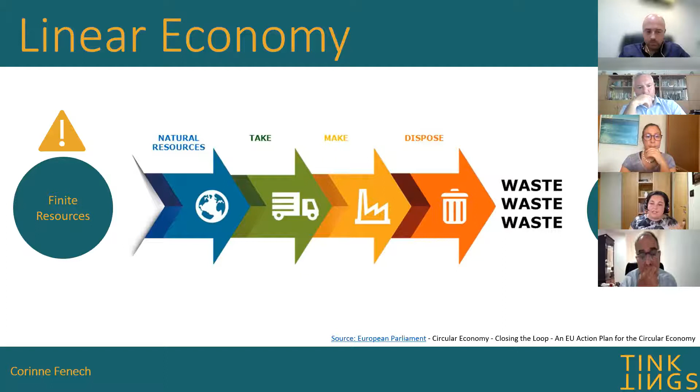The line represents the linear economy, the zero represents the circular economy. So if we have a look at the linear economy, it's very simple. We take what Engineer Rizzo has termed virgin material, we take it from the earth, we make something with it, and we dispose of it. And this leaves us with two big problems: the first one is finite resources, and the second one is increasing waste.

There are three main different economies which we are quite used to. The first one is the one which we have hopefully left behind now, and that is the normal linear economy model, where we take, we make, we use, and we waste. Then there is the recycling economy, which we are getting used to quite a lot, and it has become a good concept which every household knows. That means that we take, we make, we use, and we recycle the waste.

But then there's also the circular economy, and that means - hold on a bit - that means that we recycle, but also we return, we reuse, and we repair. And these are concepts which are very, very important in the circular economy.

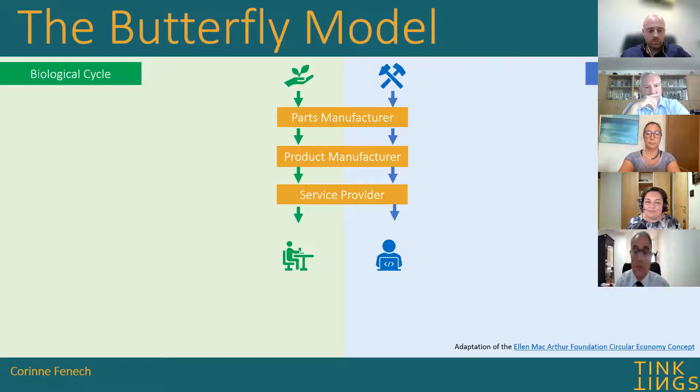On the other hand, if we look at this mobile phone, we have the parts manufacturers which produce the internal components of it, the product manufacturer who brought up this, and the service provider is the shop from where I bought this mobile phone. Okay, so here we are not consumers, we are users. And obviously in the linear cycle, we have waste, which comes out of that.

Now, the next part is where circularity comes in. And the smaller the circles, the more effective we are.

The first thing is that we need to reduce the waste in the biological cycle. That's where businesses come up with concepts like using wilted fruits to make smoothies, for example. There we are reducing waste, and that's less expensive than having to figure out what to do with the waste.

But then there are also business models which focus on restoration. We have businesses which work in this area, and I'm going to demonstrate one that works very well. They restore the biomaterial back to the earth so that we can have new agricultural products.

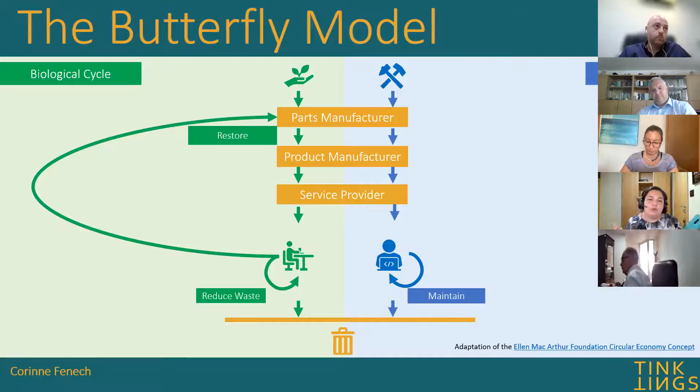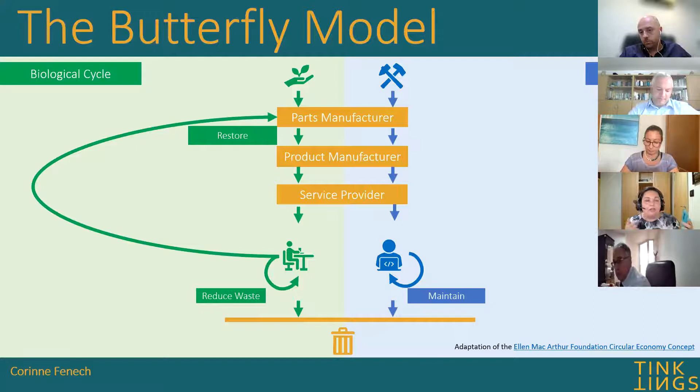On the other side, there's the maintenance. So if I'm looking at this mobile phone, the first thing that comes to mind in circularity is making sure that I maintain it well. And not just I as a consumer, but there is money to be made from businesses who work in this cycle as well. We are very much used to businesses wanting to sell more and more, but nowadays businesses are also working on making a profit through maintenance, through remanufacture, etc. So as you see, the maintenance here is a very small circle.

But then there's the redistribution. Let's imagine that I'm done with this phone because I want to buy a new one, but it still works. There are also businesses working on the redistribution side, service providers who now redistribute and resell this product.

There's also the remanufacture part. Let's imagine that this phone went faulty, and it went back to the product manufacturer. This means that the manufacturer has remanufactured this same phone, changed some components, and sold it back.

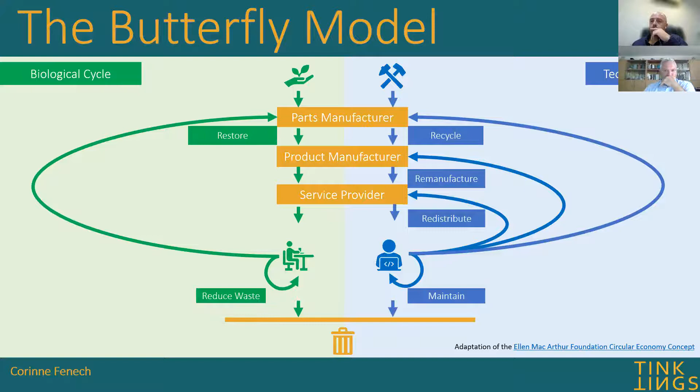And then there's the recycling part. As you can see, the recycling part is the one furthest away, and that means that it's the most expensive in the circular economy. It's not bad, but it's not as good as the remanufacture, redistribution, and maintenance cycles. This means that this mobile phone gets disintegrated and is made into something new.

Now, innovation is very, very important. That is where we come up with solutions for problems we have seen before. I'm going to give a few examples of businesses working in this area.

So we have AlgiKnit, for example. These are people who are creating fiber from seaweed. And here's the interesting example I was talking about: these solutions use biodegradable material to feed flies and produce pupa. What happens here is that we do not feed fish expensive fish, we feed them something which is not edible. And it's not just for fish, these are used as pet food and as chicken feed as well.

There's another example from the Netherlands, which is Fairphone. They've been working on this model for a few years. I'd say they're getting better, although it was a rough start. They work mostly on components and focus on maintenance and giving a fair wage to employees all over the world. And they make sure the phone has a longer battery life, because yes, battery life can be designed to be longer or shorter.

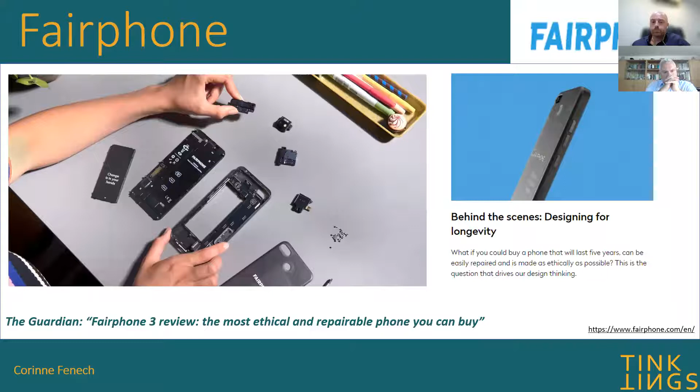Mud Jeans, again from the Netherlands, have between 23 and 40% of their products coming from recycled goods. They have also entered what is called the slow fashion movement. By slow fashion, we mean that we don't change our pair of jeans every year. There's fast fashion and slow fashion, and they happen both in the circular economy. So there are companies who ensure that clothes are biodegradable and their life cycle ends after, say, 10 washes. And there are others in the slow movement, meaning you can rent jeans and give them back to the company a year later, and depending on the quality, they resell it, remanufacture it, or simply recycle it.

This is the final example, Blue City. Blue City is a city made in Rotterdam, a place where there are startups in the circular economy. As an example, RotterZwam is a company which uses coffee residue from bars to grow mushrooms. Then the CO2 which the mushrooms release is used by another company called Spireaux, which produces spirulina, a nutritional supplement. And then there's Fruit Leather, which is a company that makes leather exactly from that, from fruit.

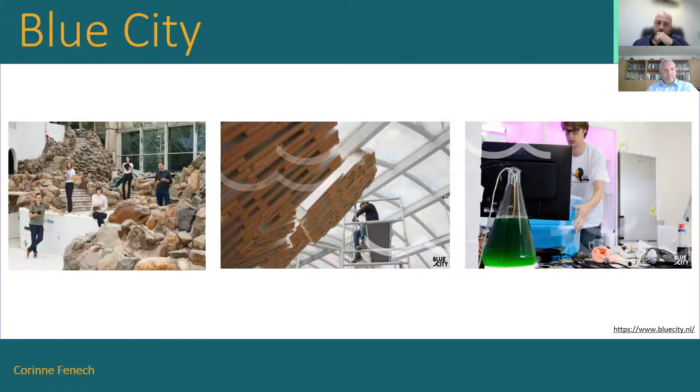Now I know that for businesses, it's not very easy.

I'm doing research currently with a number of businesses in Malta, and I asked them, can you be ethical and still make a profit? Allow me to read this response, which comes from one of my respondents. This person told me: the cynic in me says no, in the sense that it seems that the idea that in business, in order to succeed, you need to squash your competitors and all these things. Having said that, I also want to make a difference between being profitable and being greedy, and that is where the distinction comes in.

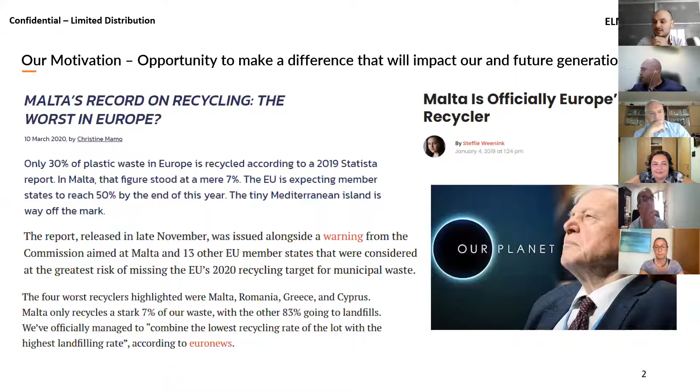Yes, thank you. So we are ELM Fabrications, which stands for Eco-Layered Masterpieces Fabrications. We are a new generation of carpenters doing a digital transformation of the furniture industry. This motivation came about when we saw a lot of negative articles online and in our newspapers saying Malta is the worst recycler, etc, so we wanted to do something about it. We chose one industry, the timber industry, which currently, as Corinne mentioned, is a linear economy: trees are harvested, taken for timber, used to build furniture, and at end of life we either throw them in landfills or incinerate them. There's a growing demand for timber, and unfortunately there are many forest deforestations because of the large demand, leading to illegal logging and loss of biodiversity.

Traditional wood manufacturing creates huge waste, and there is limited use of the byproduct. And even in Malta, we're feeling it, carpentry skills are diminishing. So the artistic touch of carpentry is being lost.

So our value proposition is that we are changing the furniture industry into a circular economy. We get biocomposites, which is the byproduct of wood and the paper industry. We'll go into that in more detail.

From the material, we make furniture, and at its end of life, we grind it, and we can make another new piece of furniture from the same material and repeat the cycle all over again.

We know for sure that the material we're using comes from sustainable forestry, forestries that practice sustainability and afforestation programs. It is 100% traceable, and we're using Industry 5.0, which is additive manufacturing and robotics for precision printing.

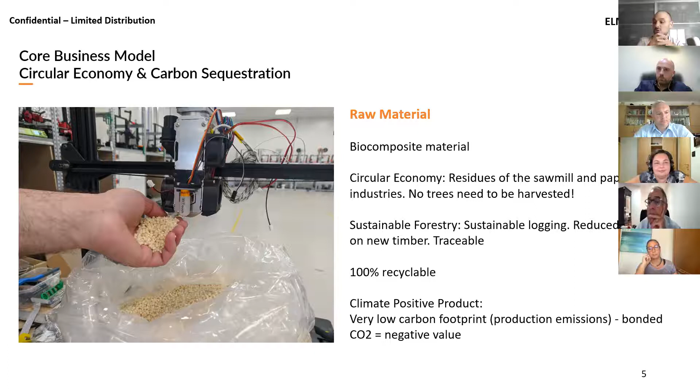And the beautiful part of this is that it's a climate positive product. So if you take into account the production emissions and the bonded carbon dioxide that goes into this material, we come up with a negative value, which means that we are actually sequestrating carbon.

So what we do currently is take this special material, biocomposite, and use additive manufacturing, 3D printing, to actually create structures.

They can be either small or large structures, in the range of 2 by 2 by 6 meters. That is possible as well.

So we're targeting different markets. It can be furniture for office, home, school, and street furniture, even marine, because the material allows for marine structures to be built, and architecture.

And when the user, the consumer, is fed up of that product, we take it in again, we grind it, and we print something new. So we have this elimination of end of life, and this circular economy even at our manufacturing site.

So circular economy to get to this product, and circular economy again to go from the end product to a new product. And if you were wondering, this is not a coffee break.

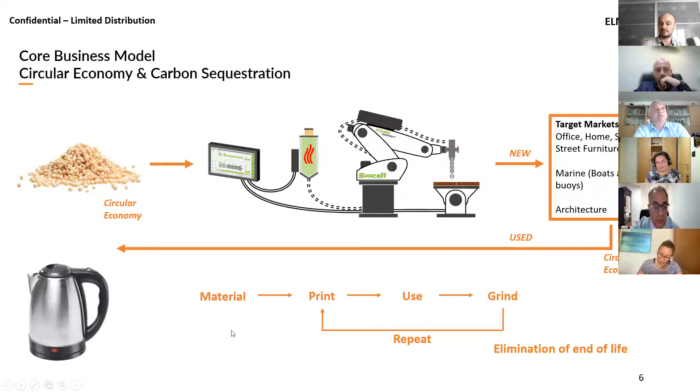The energy consumption of one 3D printer is the same, or even less, than one electric kettle, just to put you into perspective.

So our innovation is that we want to be in the sweet spot here, between the cost of a professional carpentry workshop with traditional tools for professional use. We did our feasibility study, and it is a bit more than 45,000 euros.

And in production, there are these 3D printers that range between 150K to 400K. The problem is that they return a low return on investment.

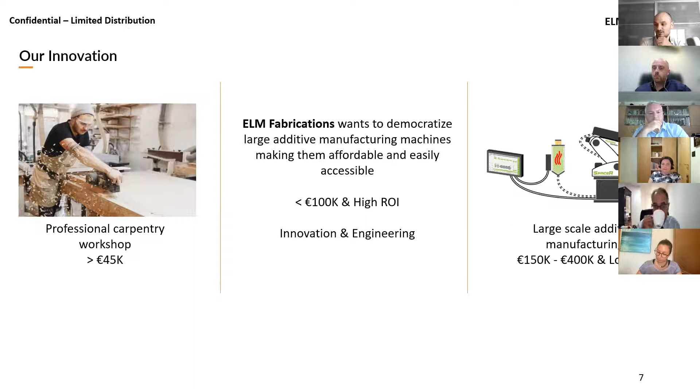So at ELM Fabrications, we want to democratize large additive manufacturing machines and make them affordable and easily accessible to many companies globally that wish to start printing. We're aiming for a printer that costs less than 100K with high ROI, and that comes with the innovation and engineering that David and I are doing.

Now, second impact is promoting a new symbol for sustainability, and these are the lines. With printing comes lines, and I have a sample over here with lines.

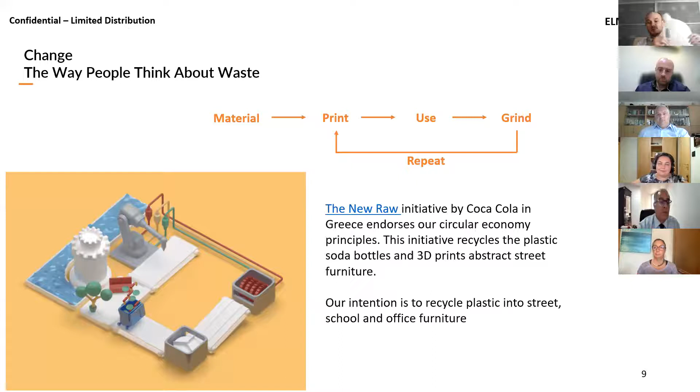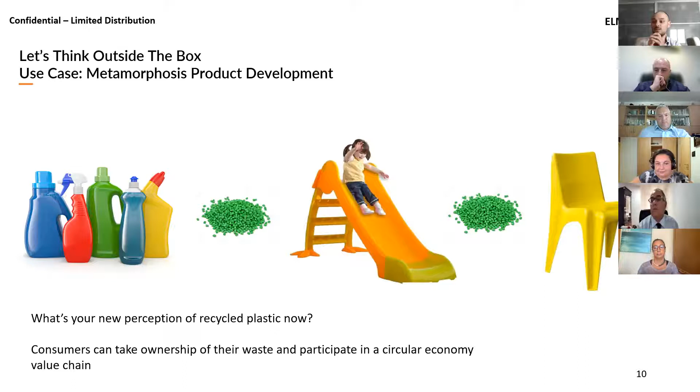They grow up, grind it again, I print a chair for my children. So it's a new way of thinking about your plastic waste, or in the other case, the wood waste. It's a metamorphosis because it's changing a lot from one product to the other. So we want consumers to take ownership of their waste and participate in a circular economy value chain themselves, so it's not far away from them.

Our big third goal, our big, hairy, audacious goal, is scaling up and making a global impact. Currently we're working on a platform and ecosystem whereby we're not only providing 3D printers at a very affordable and accessible price, but we want to be an Amazon-like platform, connecting three stakeholders together. We're connecting digital artists who can create beautiful designs that can be 3D printed.

There are many freelancers and creative people out there. We want to connect them to 3D printing facilities all around the world using our machines. That's how we scale up, because we make it affordable. Thirdly, the consumer: they can go online, choose the digital artist or furniture they like, order it, get it printed, and delivered to their homes. End of life, send it back to the nearest manufacturing company, grind it and reprint it into whatever you want.

The founding team is myself, David, who many of you may know as the guru of 3D printing here in Malta, who also owns Invent 3D, and Pablo Piatola, our chief designer for beautiful furniture. He's an architect and was also a major contributor to the Nokia 3310 design.

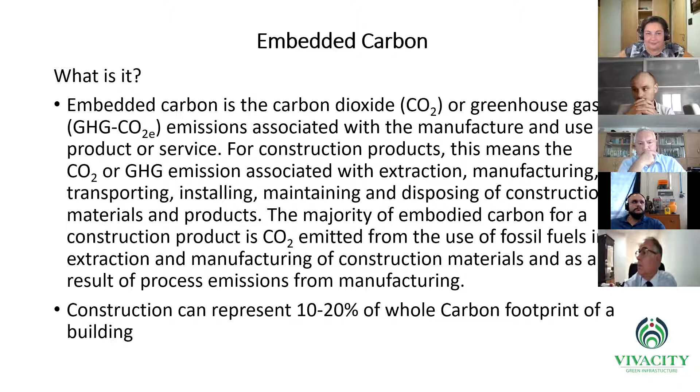Thank you. So we are looking at this in the context of climate change, and this is where circular economy and green economy come about. With the growth of our cities and as they become more densely populated, we need to find methods for limiting embedded carbon and compensating embedded carbon, so balancing it out.

The previous speaker, Mr. Atsopadi, mentioned a change in materials to more sustainable options. This is a very good option which avoids extraction in many cases. We're talking about reuse and recycling of construction and demolition waste. This does exist in many EU member states, and we're looking at upcoming legislation by 2024, most likely, obliging recycling and reuse of construction and demolition waste. This includes reuse and recycling, but also separation at source, keeping construction materials separate in their waste phase to facilitate reuse and recycling.

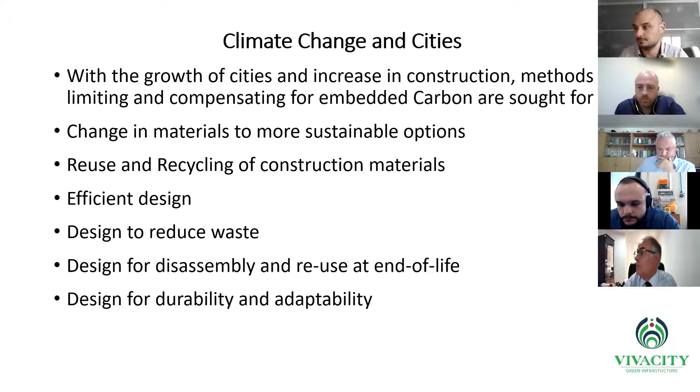Thank you. So operational embedded carbon generally refers to the use of energy within the building. Most energy is used for heating and cooling, not so much for appliances as a percentage. Ways of overcoming this and reducing the energy consumption of a building are insulation design, called passive design, using the heat of the sun to heat the building and wind currents to cool, but also to heat. Green roofs, another insulation method, and green walls, the same. These are techniques that we use as a company.

Renewable energy, which replaces energy from the grid, which will most likely still be carbon-based energy production. Solar water heating, again reducing the carbon impact of power production, and avoiding soil sealing. Every building that is constructed seals the soil it is sitting on. The carbon impact of this is that the building creates flooding when it rains and reduces the amount of water which can re-enter the water table. The carbon impact of that is the need to capture water from the sea.

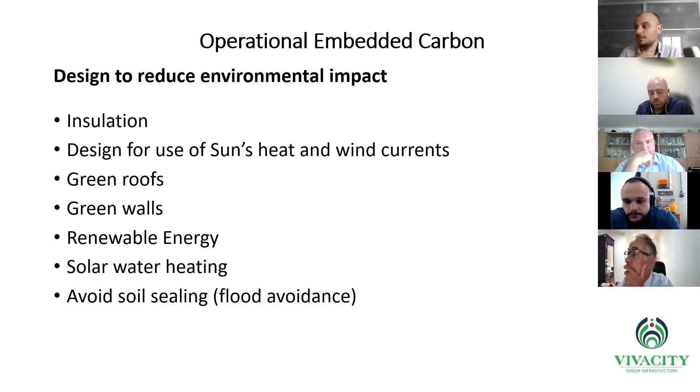Power generation is needed for clean water, but also to manage the destructive effects of floods, which damage roads, damage property and possessions, causing waste. The floods in Germany this summer, it was calculated, will take 4 years to treat the waste, because it can only be treated through waste incineration, as it's all mixed and dirty, which was caused by those floods. This is because of limitations in waste incineration capacity; it's not planned to deal with this kind of disaster. Next, please.

This is a green roof, which we installed for ENEMED in November last year. This photo was taken in September this year, so it was 10 months old.

The water need is very low, and a green roof can reduce heating and cooling needs of the building by up to 75%. So this is valuable for offices, houses, warehouses, and computer server storage banks, which need to be kept at constant temperatures.

So a couple of facts. We have now installed over 1,000 square meters of green roofs in Malta in approximately 2 years, minus COVID months. All of the materials that we use to make the green roofs are 100% recycled content, and they are 100% recyclable. So there is zero carbon balance, meaning there is zero embedded carbon within those materials. And because this system does not use any chemicals in the soil to propagate the plants, there is no added carbon there from fertilizers.

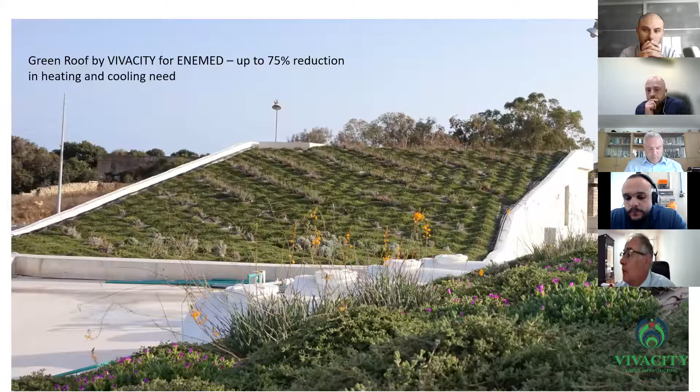So just a calculation that I did using Maltese energy data on possible CO2 and CO2 equivalent savings using green roof ecosystems. According to Maltese carbon emissions from electricity production and average use in Maltese households, the emissions per 50 square meters of roof per year are 1.29 kilos of CO2, and per 100 square meters of roof are 2.59 kilos per year. It doesn't sound like a lot, but when you add it up, it adds to a rather large sum, which adds to Malta's exceedance of CO2 emissions according to European emission limits per year.

Now, when we look at how much CO2 our green roof ecosystem can sequester, the calculations come to 23 metric tons per meter squared per year. So if you compare that to the amount of kilos emitted by that building, you're sequestering a great deal more carbon dioxide and equivalent than is being emitted by the building. This addresses other CO2 emissions, for example from transport, and can be a very effective tool in managing Malta's overall carbon emissions and path towards carbon neutrality.

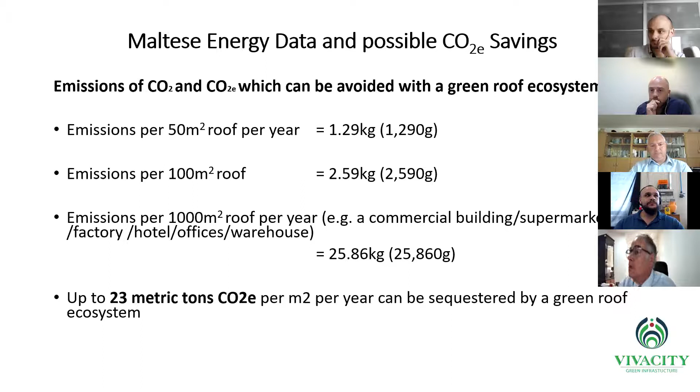So a quick EU update on related legislation and policy to embedded carbon. In July this year, the Commission adopted a proposal for a regulation setting up a new carbon border adjustment mechanism. This is an obligation for importers into the EU to report the embedded emissions in certain carbon intensive products, initially aluminium, cement, iron, steel, electricity, and fertilizers, and to buy certificates to account for those emissions.

This is to complement the EU emissions trading scheme. It is a mechanism invented to ensure that production of carbon intensive goods does not shift from within the EU to cheaper, laxer third countries. So this has two aims: the first obvious aim is to not have environmental dumping and give that obligation to third countries, but also to protect investments made within the EU market. This is something which is always brought up when such new legislation comes into effect.

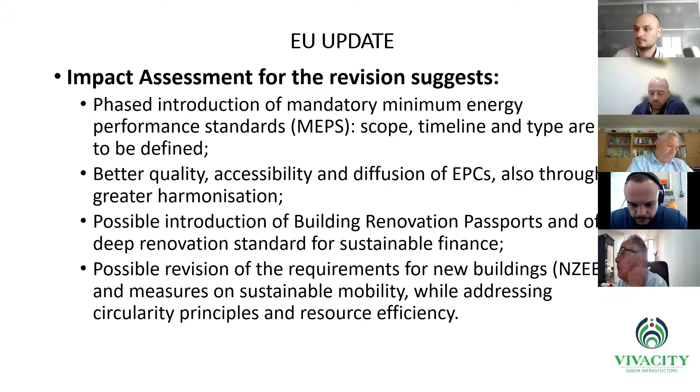Then it is looking at introducing a higher target for reducing primary and final energy consumption by 2030, up from 32.5% to 36%. It is now binding at current levels at EU level, and this is in line with the climate target plan. They are thinking of introducing a benchmarking system for member states to set their national indicative contributions to the binding EU target.

And nearly doubling member state annual energy savings obligations in end use. At present, the obligation is 0.8% per year, but the proposal seeks to raise this to 1.5% per year, starting in 2024 and aiming for 2030, before which there will be another revision.

Other policy areas which will affect construction and the urban environment are the EU Biodiversity Strategy 2030, the EU Soil Strategy roadmap at the moment, and of course all of this is underpinned by the European Green Deal.

The Green Deal focuses very much on bringing greenery into cities in order to control temperatures, to control the inner city climate. Not only oxygen levels, but using greenery to cool the air and to cool buildings, and thereby reduce the need for air conditioning, which heats the outside air while it is cooling the indoor environment.

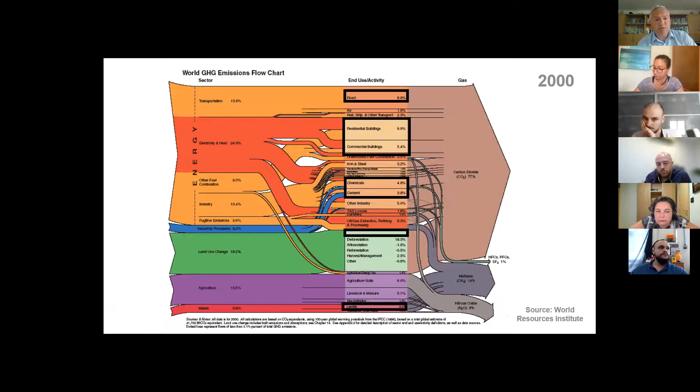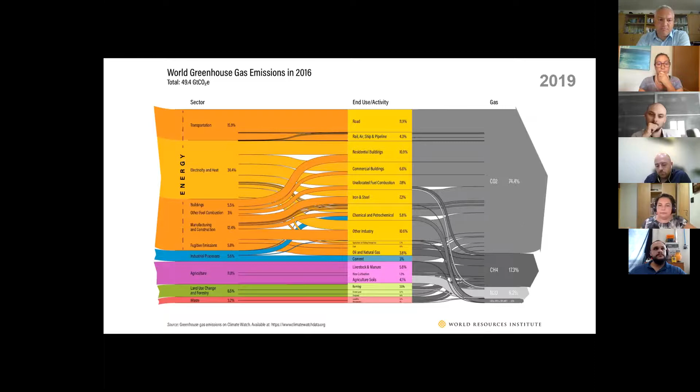And incidentally, 20 years later, we have the same situation, or rather it's even worse, where most greenhouse gas emissions reported as recently as 2019, even though the chart from the World Resources Institute refers to 2016, one can already see this dramatic increase in emissions associated, as I said, in most cases with the construction industry or construction processes. So this is a first reference to materials and resources we consume in our industry.

Referring to a publication I came across recently from 2019, which refers to decarbonizing our industry, it identifies 6 items we could do as an industry. Out of these 6 items, 4 are repeatedly referred to in other research and publications, and are directly related to materials and the way we deal with products.

We have more efficient use of materials. Other speakers mentioned how we can extend the life of our structures and buildings rather than demolition and getting more waste. How to switch to low impact, low emission materials, and how to use low carbon cement. Cement and concrete are already identified as a core issue because of the huge quantities we produce and consume globally, knowing that cement and concrete consumption is second only to water in terms of human consumption. Then we have recycling of building materials and components.

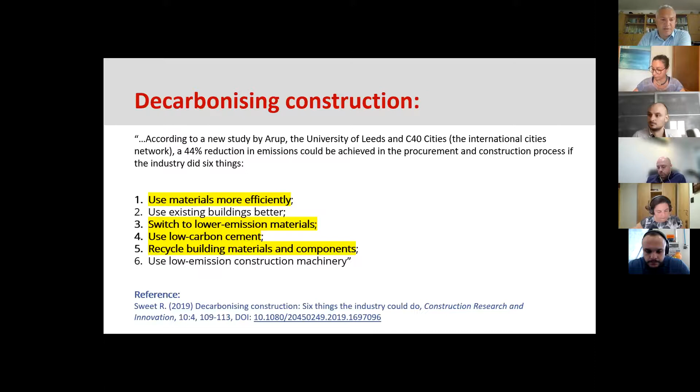So we already see this important observation referring to materials and the impact of products in the industry. Even more, a recent document published by the European Commission, which refers to climate proofing of infrastructure, goes on to refer to circular economy considerations directly when discussing how to best deal with climate proofing our infrastructure. This gets us to think even deeper on how we are dealing with resources and our byproducts.

As a summary, when we look at raw materials, waste, and their impact, we need to acknowledge that the construction industry is the largest consumer of raw materials and resources, therefore contributing to a significant amount of carbon emissions. It's one of the largest producers of waste, and this is increasing whether we like it or not.

It is also an industry which consumes resources and generates large quantities of waste, and therefore creates opportunity for recycling. There is a growing demand for construction aggregate worldwide, and this is even expected to continue increasing with time.

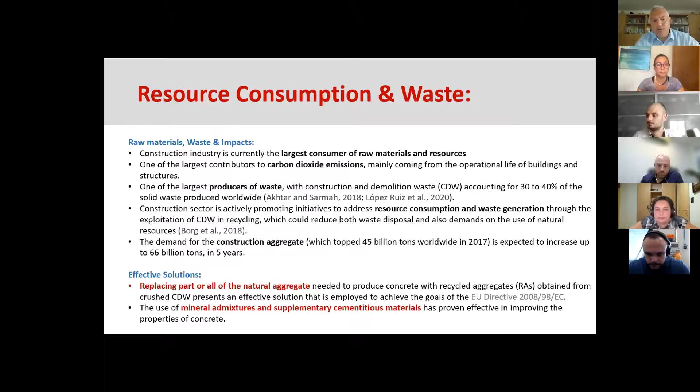So there are effective solutions, and there are two important solutions in the industry which refer to materials - I'm referring primarily to materials today. First, the replacement or part replacement of natural aggregates with recycled materials. Second, the exploitation of mineral admixtures and supplementary cementitious materials to get rid of cement, or at least to lower the impact of cement in the industry.

I would like to focus on some possible solutions, some of which have been tried and tested in industry, and some of which are reaching the market now or shortly, or have already been introduced, which can help us better understand that there are indeed some solutions. No solution is perfect, no solution addresses all possibilities, but we can definitely exploit options in order to have a better construction industry which relies on improved exploitation of resources and a reduction in the generation of waste.

So let's look at low impact product number one.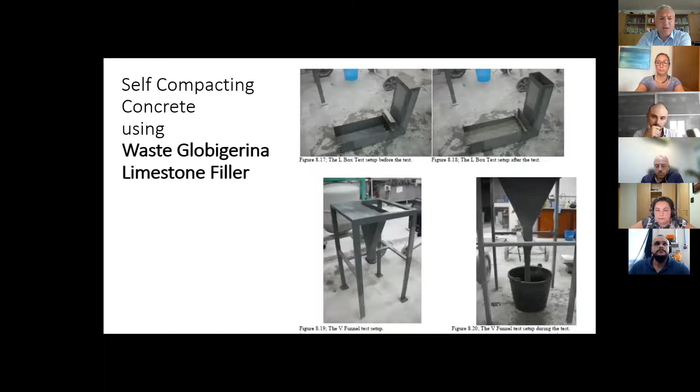Low impact product number one, which is in some instances already introduced in construction, at least on a large scale in most European countries, perhaps not yet on a large scale in Malta, is the exploitation of mineral fillers which originate from waste and self-compacting concrete in large quantities, in certain instances as part replacement of cement. This is some research conducted at the University of Malta, extensive research over many years, where a large amount of limestone filler was exploited to produce high-performance concrete, self-compacting concrete, which facilitates production, facilitates construction, and reduces the impact of the construction process itself, thanks to a more innovative product material.

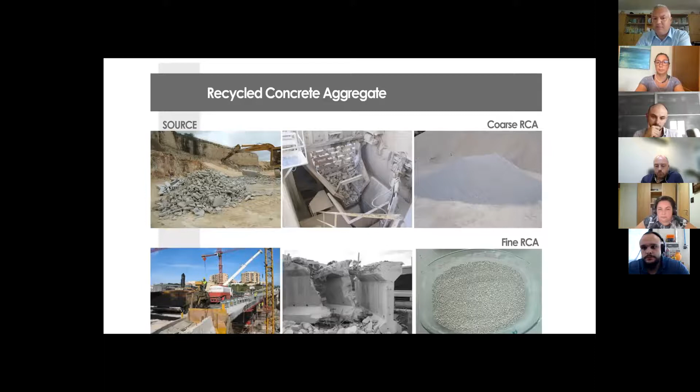This, in combination with exploitation of recycled aggregates, has led to some interesting outcomes, well integrated in industry. Why? Because exploiting these mineral resources, which originate from waste - therefore byproducts from other processes - has indeed led to improved performance of these materials. This is key, because we are not dealing here with inferior products, but with improved products, thanks to the waste itself.

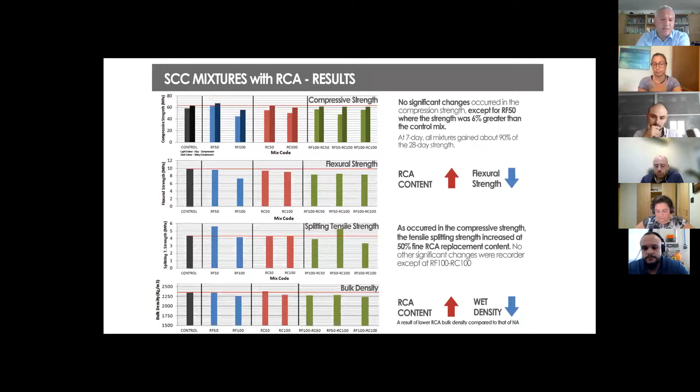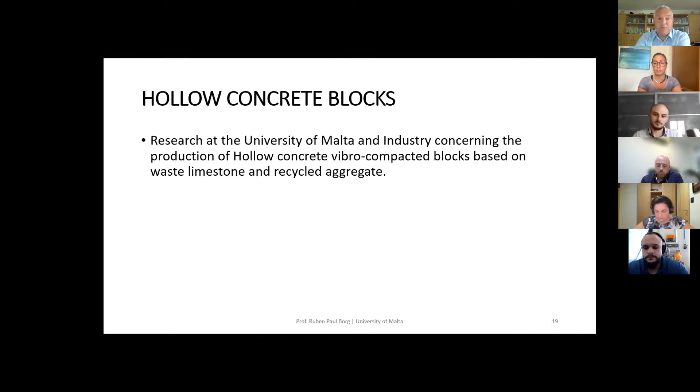Impact product number two, which is also a successful product used in large quantities and on the market and expanding, is based on waste. We have developed at the university concrete blocks using basic technology which rely exclusively for the aggregate components on waste, on a byproduct, which is globigerina limestone, which would merit only a minimal amount of treatment in order to be exploited to produce these blocks.

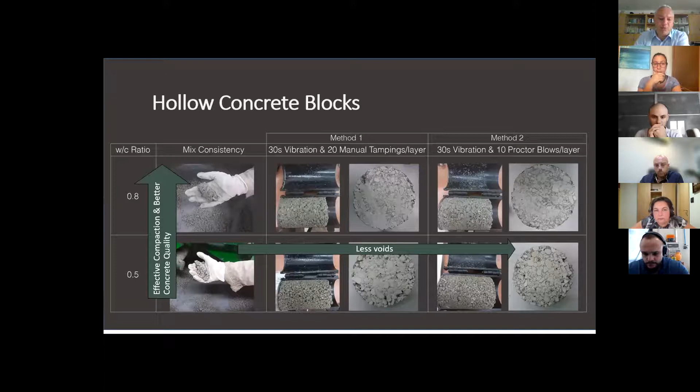We are seeing here the elimination of use of new aggregate, and indeed the take-up of this waste material, which most often we consider as waste, but in reality offers a golden opportunity for exploitation without much processing, because we are dealing with a well-known industry, the production of vibro-compacted blocks, which is one of the most popular construction products we have in the industry.

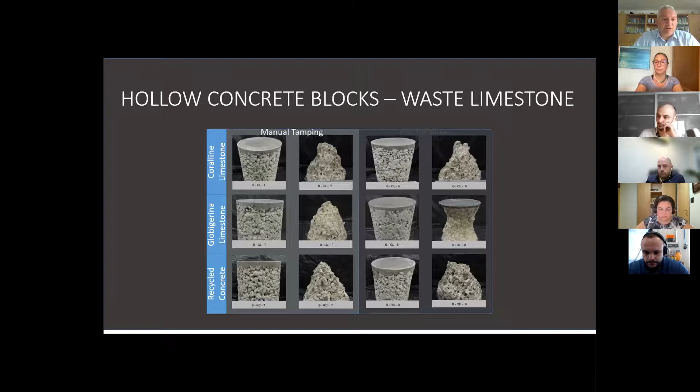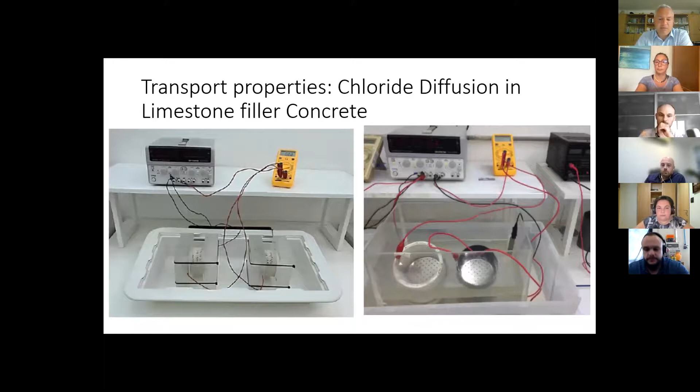Low impact product number three: a filler which can complement and be used effectively in normal concrete, and which can lead to improvements in concrete durability if used well. This requires improved production in our industry, at times necessitating not necessarily new plants, but better precision and improved skills, greater awareness of quality. This has been well tested with respect to durability performance, because we are interested, as other speakers have mentioned, in the longevity of our structures - how long would they last. We want more durable products, meaning structures that last longer and are replaced less frequently, saving on natural resources and better exploiting our materials.

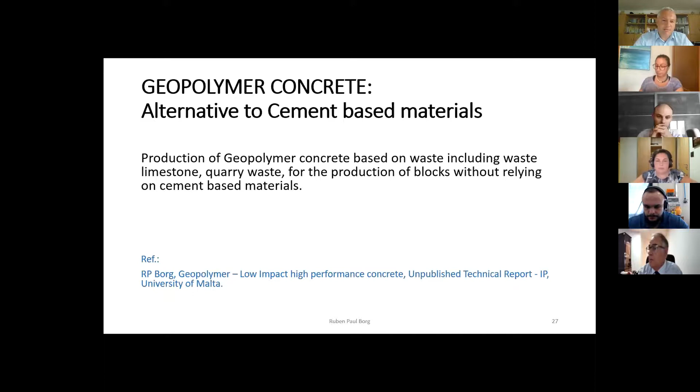Low impact product number four. It's a product I'm quite fond of, currently being developed in terms of intellectual property at the University of Malta, which with a small team I developed as a concrete without cement. I'm fond of this product because it does away with cement as a polluting product and leads to a high performance concrete, suitable for various elements, which can easily be used in construction. Various research projects over the years have led to quite interesting results, indicating that this product is stable when it comes to longer term performance.

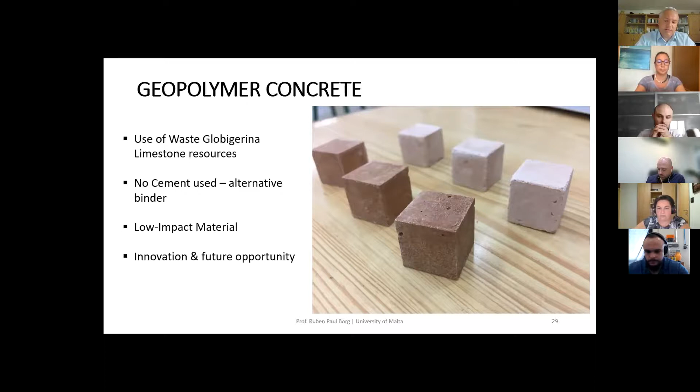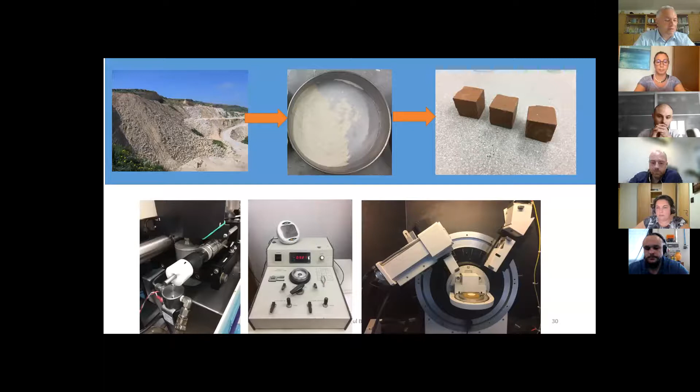The innovation here is to eliminate the use of cement as a binder, to exploit large quantities of the waste we generate, which I would rather call a byproduct, and propose it as a low impact material, but definitely also as a high performance product for industry. It's basically extracting our waste, which has been dumped, or waste generated when we excavate, and transforming it into a high impact product.

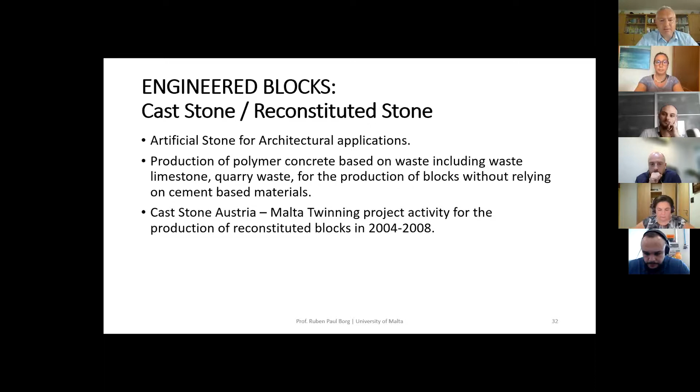Low impact product number 5. Once again, we have exploitation of our natural resource, limestone and other waste deposits, to produce a rather attractive and interesting architectural product, reconstituted stone, or as referred to in Europe, the UK, and America, as cast stone, where one can exploit this engineered product to produce technological assessment of the raw material and then actual products similar to a natural limestone. In other countries it's a natural product they would extract normally, but it can be engineered to have improved performance, both in terms of strength and durability.

Relying on different options for technologies, we see also different developments, even in Malta, for different production options, which can reach the market, in some instances, as architecturally attractive blocks which resemble limestone, but which can have engineered characteristics.

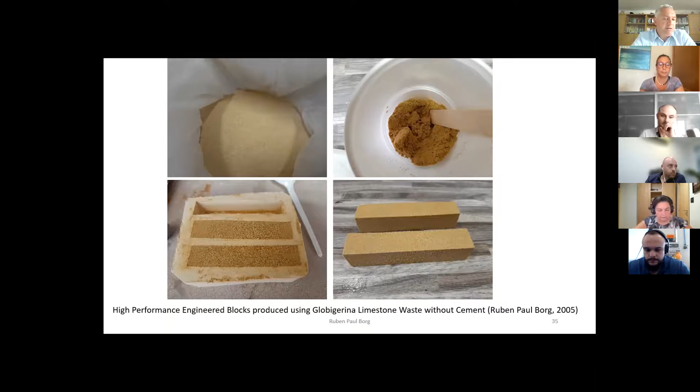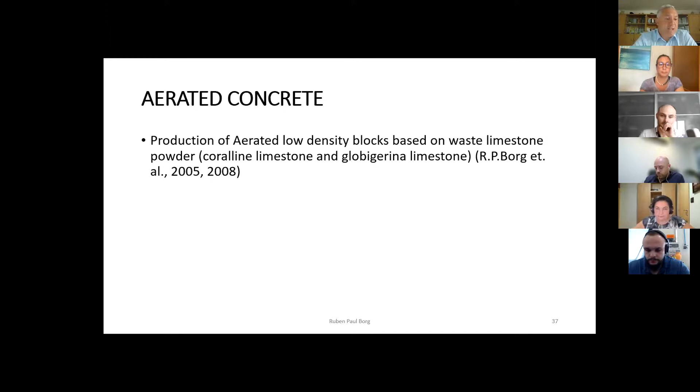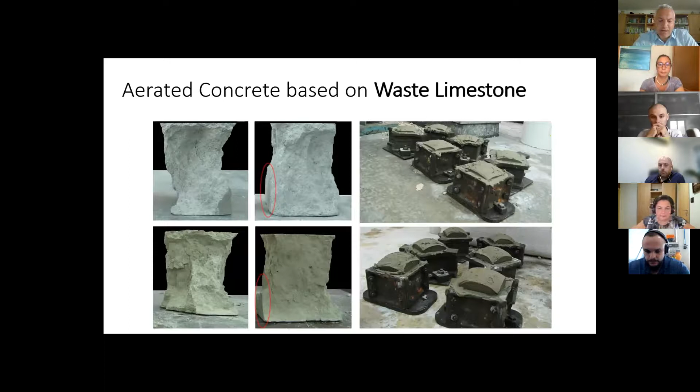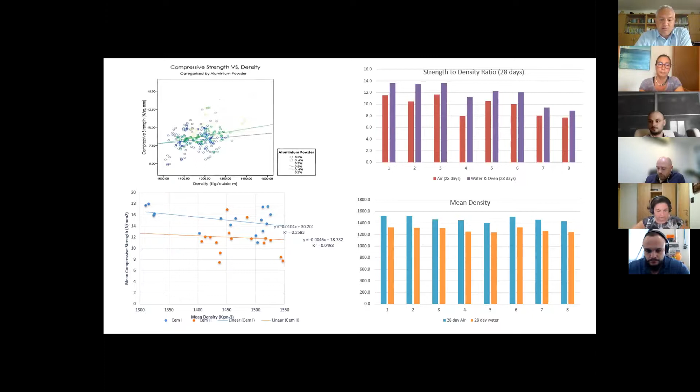Low impact product number 6. This is very interesting because we are looking at exploitation of large quantities of waste limestone in order to produce lightweight blocks. This has been successfully done in academia, in our research facilities, by my students and my collaborative researchers, where we have produced low density blocks which can easily be exploited as insulation blocks, but also to introduce new concepts in construction, where we can have frame structures relying on demountable walls or demountable lightweight partitions.

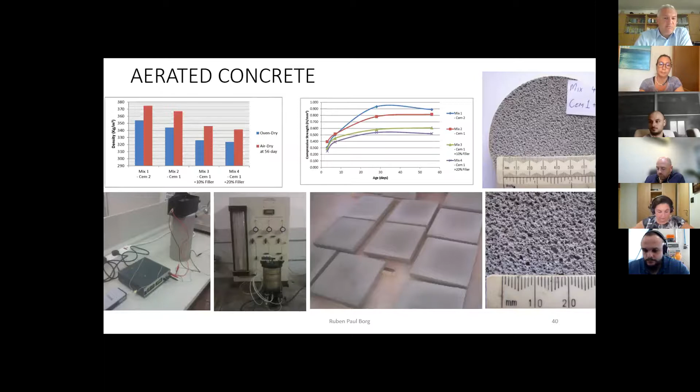We've also tested it thoroughly in terms of thermal performance, exploiting this as an insulation product, either in combination with existing blocks or also as panels, which can be used in retrofit applications or even new construction, because these products can even be developed as load-bearing elements, for example. This is very interesting because it has actually reached the market.

And of course, in this case, it would be competing, it is actually competing with whatever is imported into Malta. That's why I refer back to the initial premise, where we have to take into consideration the fact that we import everything, which means there is embodied energy in whatever we consume in the industry, thanks unfortunately to the shipping and transport required. This highlights the importance of making good use of our local resource.

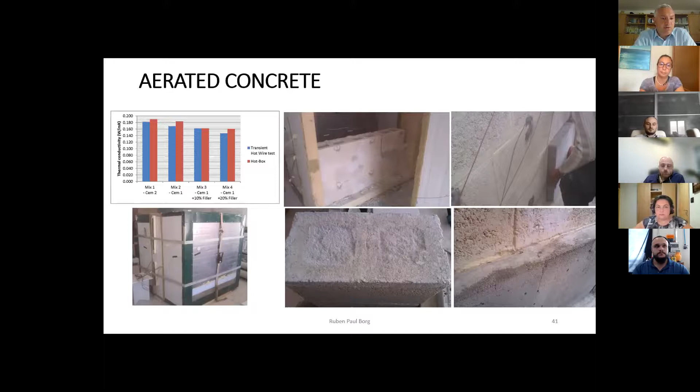Well, shall we push the boundary? Why not? In our research, one of the most cited research we have in our faculty, in our group, refers to exploitation of plastic. This was research done many years ago, which is well cited even today, where we managed to transform plastic bottles into an important product.

And I'm aware that Italian companies are exploiting this commercially in order to enhance the properties of normal concrete. We've tested it thoroughly, published it well, and we've obtained really interesting results, even in order to improve the properties of concrete.

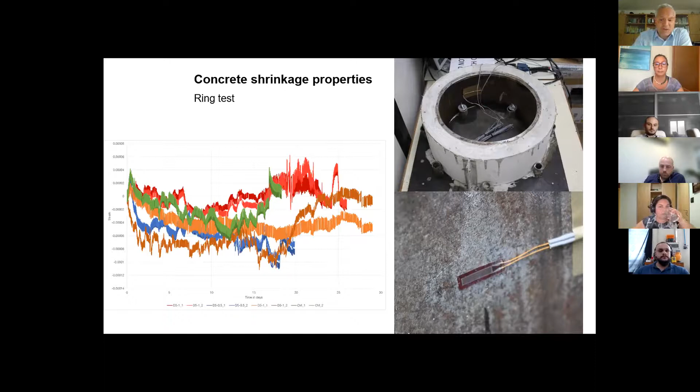So we are improving on whatever property you can get with normal concrete, by having concrete with improved early shrinkage cracking, for example, or improved drying shrinkage cracking performance, and in terms of controlling cracks, but also in terms of improving hardened properties, flexural properties, and toughness of the material.

And even pushing further the boundary. Well, this is not yet commercial. Perhaps it can be one day, but why not? Exploiting an invasive species, even though it characterizes our landscape, but exploiting extracts from this plant.

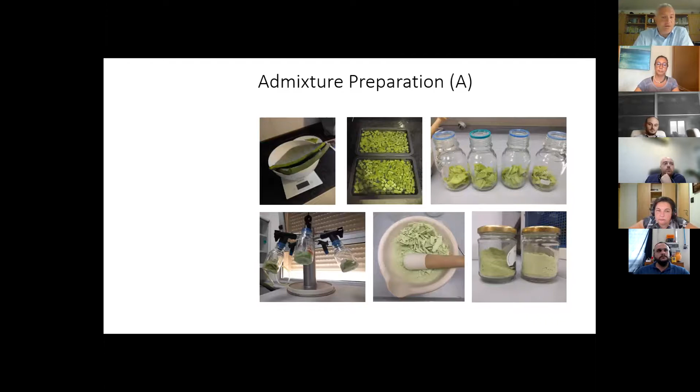We've analyzed this thoroughly and published this work where we exploited what we can extract from Opuntia ficus indica in order to produce a concrete with improved performance. And this works, it works fine.

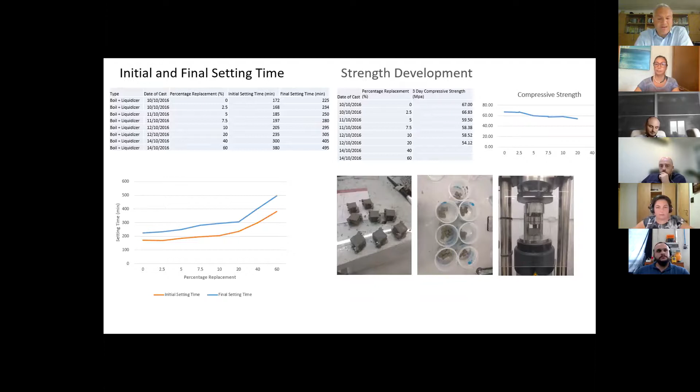It led to improved properties in terms of early stage properties of concrete, dealing with concrete when it's still workable. Well, so I've referred to some products which are either on the market, we've developed in our research and pushed them into the market, or else they are close to being exploited as reconstituted products, or whatever one would like to call them, recycled products.

I prefer to call them engineered materials, because they can be engineered to suit any application, whatever need, intended application, if I am to use the terminology of the European regulations and European codes, any application, intended use, one intends to exploit them. But how can we really measure the impact of these materials?

How can we avoid falling into the trap of greenwash? Because some items, some ideas can be really interesting. But then when you really measure the true environmental impacts, and when you measure the true circularity, let's say, one starts realizing that there are flaws in the way one is presenting the information, which can easily be highlighted.

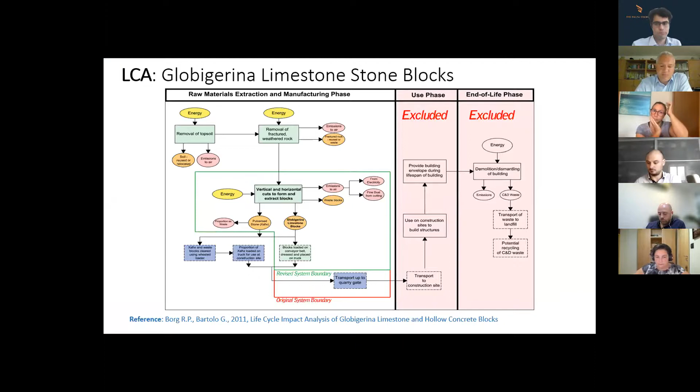So we rely on life cycle analysis, and this is an important tool which we exploit. We've exploited it for Globigerina limestone blocks. We've exploited it many years ago when, with the twinning project, we were developing cast stone. We exploited it in developing hollow concrete blocks with waste materials.

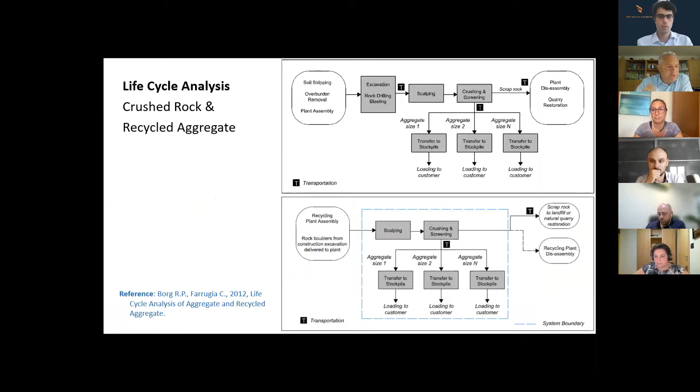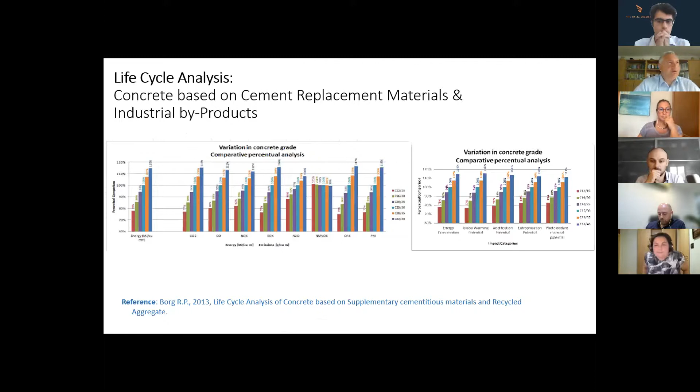And we exploited it even in more detail when transforming waste into a recycled aggregate, demolition waste into recycled aggregates, in order to get a useful product, but which is truly sustainable, which is truly contributing to lessening the environmental impact. These are some of the life cycle studies which helped also define a better concrete, relying on alternatives to cement, what we call supplementary cementitious materials, or concrete which relies on recycled aggregates.

And skipping on to an important item, thanks to these supplementary cementitious materials, thanks to concrete based on waste, what is remarkable is that you can actually get more durability in our structures. In fact, most of the high durability concrete we develop relies on waste materials.

At the moment, in my research team, we are engaged on a number of projects, mainly related to major infrastructure in Malta, related to heritage structures which we still use and exploit, but also related to residential blocks and other properties, where we are trying to understand how to extend their lifetime, because demolishing these buildings would create a problem.

And we are aware also that the largest problem, the largest challenge in construction, which accounts at times to half of the cost which goes into construction, is related to repair of reinforced concrete structures, because of degradation, because of inferior quality materials used initially, but also because of lack of maintenance.

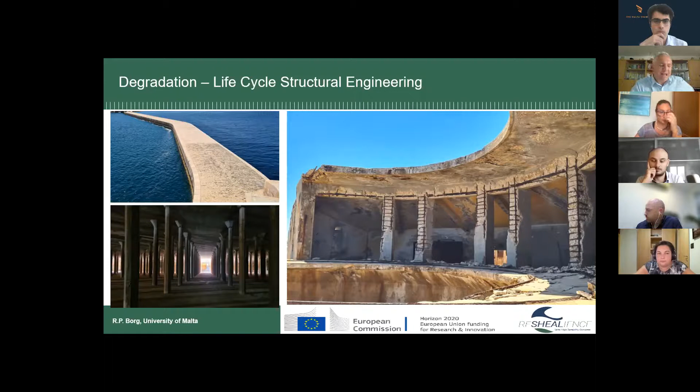My colleagues earlier mentioned maintenance of structures and infrastructure. So dealing with these structures, dealing with degradation, and how to look at life cycle structure engineering, is very important. And this is where, in our core research, in my team, we are developing self-healing materials.

These are materials which are no longer based only on research. We are exploiting them at industrial scale. In fact, some structures in Malta, even residential blocks and even large projects, rely on self-healing additives which are used in order to improve the lifetime of these structures.

What we do in our research is to even refine further on these products. And what you can see here is the healing of a concrete, lessening the need of maintenance, even knowing sometimes that we might not be so effective in dealing with maintenance strategies.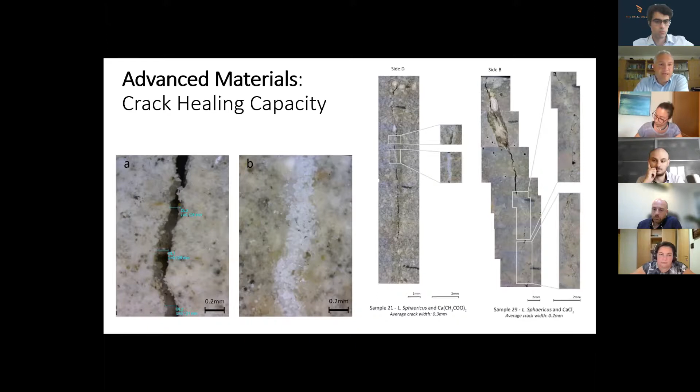So relying on self-healing materials is really a good opportunity for our industry in order to contribute to extended lifetime, and therefore contributing directly to circularity in construction. But shall we look at it as we are dealing with waste or dealing with byproducts?

In an international forum I chair, where we are developing high impact materials based on byproducts, we eliminated some years ago the use of the word waste, because most products, in reality, if you look at fly ash, which I've really worked a lot on, it's a product you buy, but it's a waste, a byproduct from the burning of coal in power stations. But it's a product, you buy it actually. And the same with slag, the same with some other materials we use so often in construction.

And it's these products which are even costly and which contribute to improved performance in structures. And to address this, years ago, we embarked on this activity where we developed a guideline document to classify waste. Allow me to use the term waste, for instance, where we developed a guideline to transform waste into a resource.

How? By classification. But classification for Malta cannot be done by simply seeing what the UK is doing or what European countries are doing. So we had to develop our own standard based on our own possibilities and limitations, because we have our own materials.

So whereas the framework is related to international standards, the standard developed at the University of Malta in collaboration with MCCAA, Technical Committee 800, and also thanks to the support, financial support through a collaborative agreement between the Building Industry Consultative Council and the university, was precisely to be sensitive to the peculiarities of Malta, peculiarities of our waste.

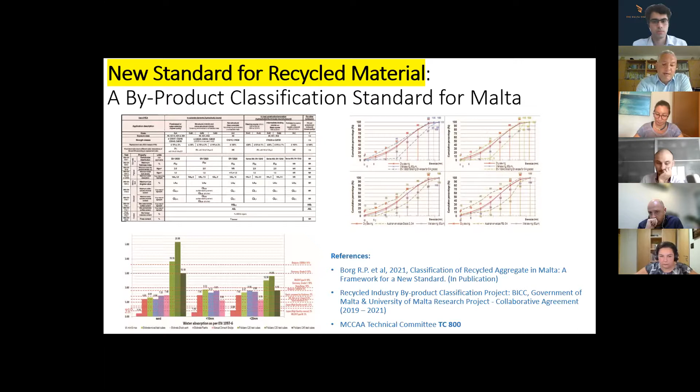And another key item, which is very important - I think someone mentioned it earlier, a number of speakers actually mentioned - is looking at what comes out of whichever process we deal with as a high performance material. And in fact, a recent research we published as a group with international collaborators is actually a dramatic step in producing a high performance concrete for high-end applications, which is even better than the original concrete.

But this is entirely 100% based on recycled concrete and reaching really high performance in terms of durability when it comes to chloride penetration, when it comes to gas permeability, and when it comes to dealing with toughness of the material. So this is, I think, where we should be aiming at.

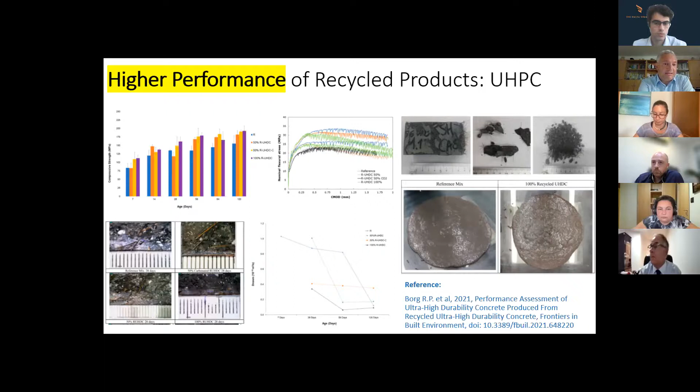We should be looking at high performance materials which can be well exploited by industry. And how can we implement circularity? Of course, there are various barriers, but also opportunities.

Moving from improving the research base, but also looking at economic feasibility, market opportunity, go all the way to having a vision for the industry, how to best exploit the different solutions we can rely on to have better durability. And this is a preliminary attempt based on some economic studies we are conducting on what can really benefit, and what can really benefit in some situations, because not any product, any solution is ideal for all applications. And these are all opportunities one can look into through various studies.

And finally, how can we look at opportunity through applications for the construction industry? Well, there are initiatives which are taken by industry. I will share with you what I can, because these are projects I led or I was directly involved in, but I'm sure there can be others, even in the future, which can well be considered as best practice examples.

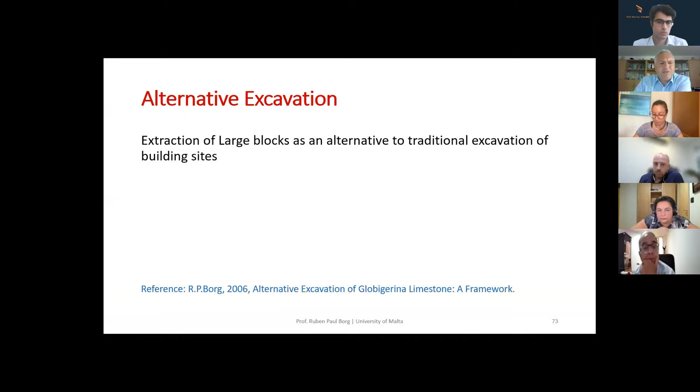And first, for example, this is quite dated actually, but it was perhaps one of the first where, on a large scale, we studied in detail the extraction of large blocks as an alternative to traditional excavation, precisely to avoid having waste in the first instance. And this was quite successful, and the study gave very interesting results from a life cycle analysis, life cycle impact perspective.

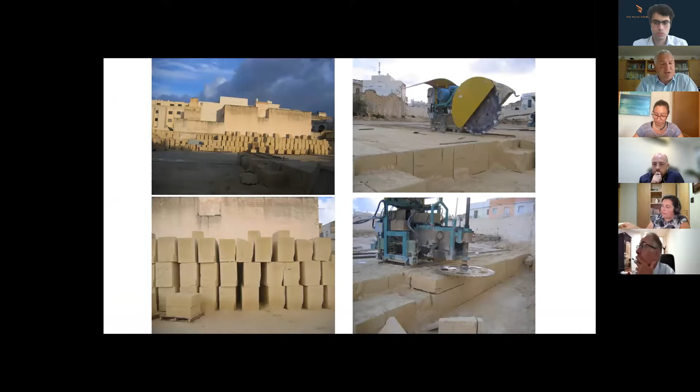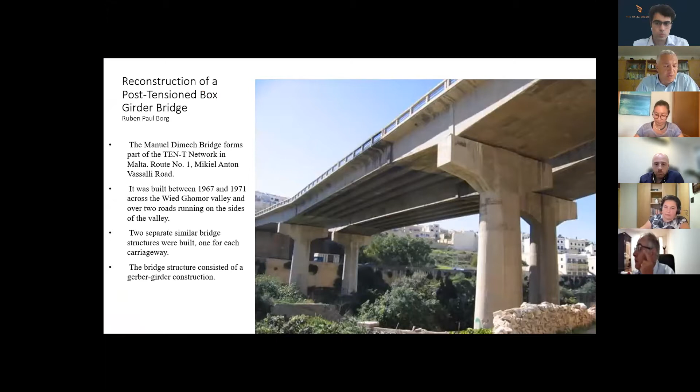Another study, which was also done with industry, is when we recycled all the concrete from the demolition of this bridge, Manuel Dimech Bridge in St. Julian's, where it was well studied, well characterized, and it was used to produce a high performance concrete.

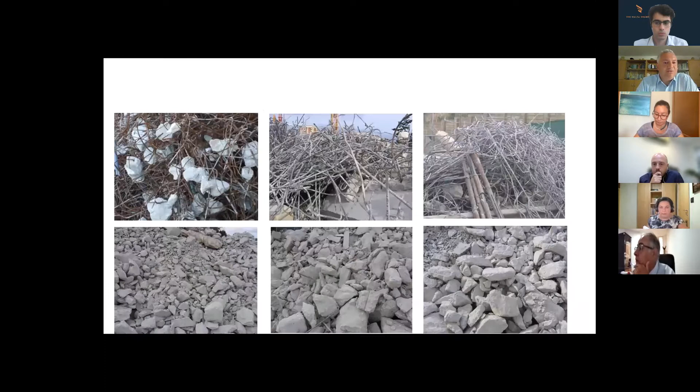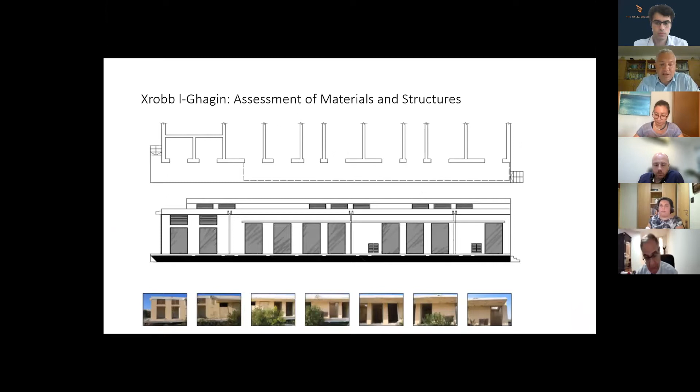Even because it was well treated, well sorted, and used to exploit on a large scale. Another instance is where we attempted to see how to refurbish instead of demolish. In this case, it was a radio relay station, which we convinced the authorities has cultural value as industrial heritage. This is about 15 years ago now, but it was used as a test case to recycle materials and reuse them in the structure and monitor this process. Of course, you can see the degradation here. We classified the waste patiently, and we reused this material for the new product.

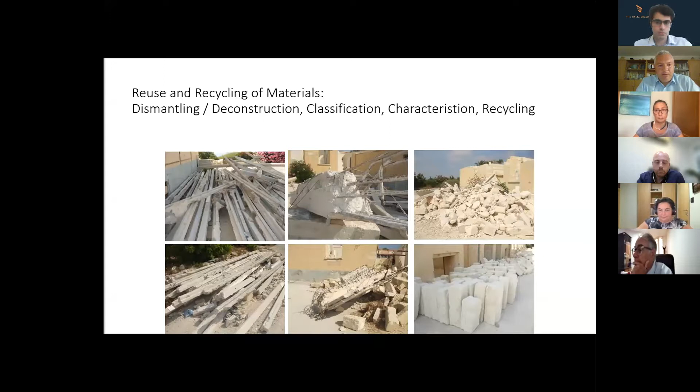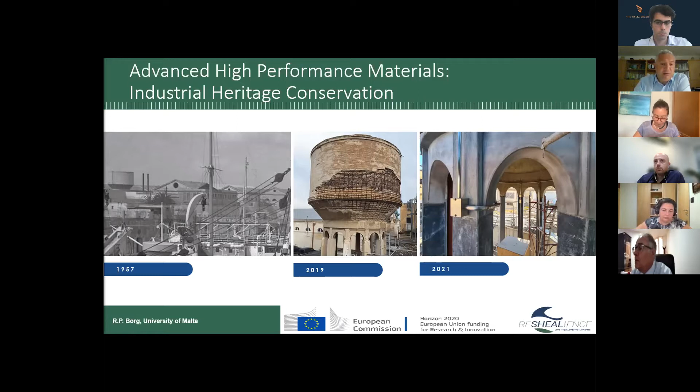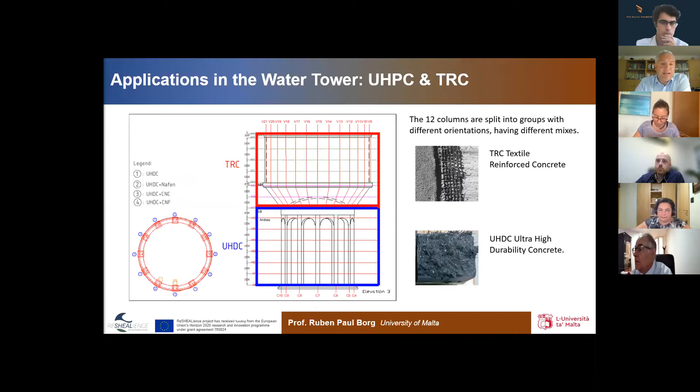Fast forward to actually last week when we commissioned in our team a University of Malta project in collaboration with government, where we refurbished a structure which was going to be demolished. It's industrial heritage, but we are using it as a test case to show how to conserve water, but also how to value industrial heritage. And last but not least, how to introduce new technologies. Here we have highly advanced, high-performance materials, self-healing materials, which are used in different ways, appropriate to the needs of the structure, and together with a structural health monitoring system in order to refurbish heritage.

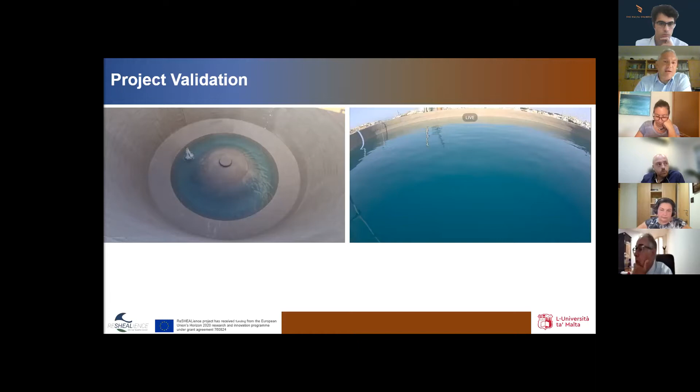And then we validated it actually last week in order to make sure that thanks to these highly advanced materials, entirely based on waste, so we have here waste-based high-performance materials, you can achieve actually higher performance, something which in this case you could never achieve with a normal concrete, with a normal material. So it's only thanks to recycled waste materials that we could achieve this high impact, high performance. Okay, thank you for your attention.